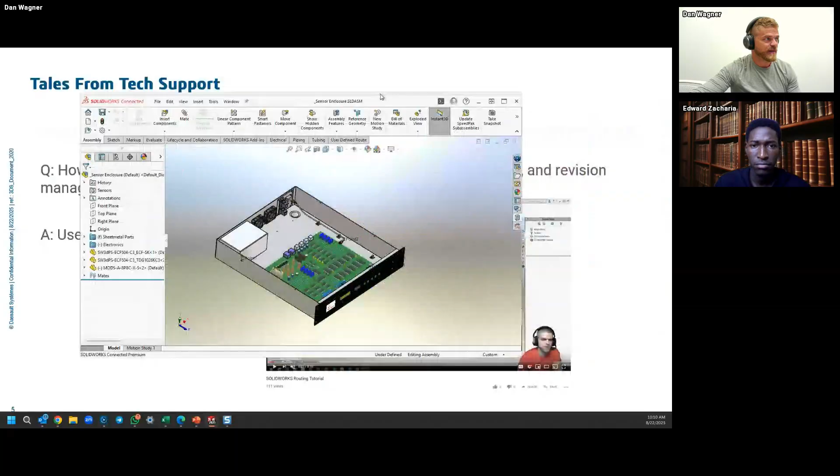What we're going to do is get into a question and answer format here in SolidWorks. I actually have SolidWorks open in the background, so we're going to do everything live. I'm not showing you any videos or pre-recorded stuff, we'll click through and do everything live in SolidWorks.

This was a question that came into tech support kind of frequently: how do we create a standard route that we can use again and again and revision manage it in PDM? How do we use it in PDM? The answer to that was doing something called reuse route. But the question's kind of bigger than that, because if you're familiar with SolidWorks... let me jump over to SolidWorks now.

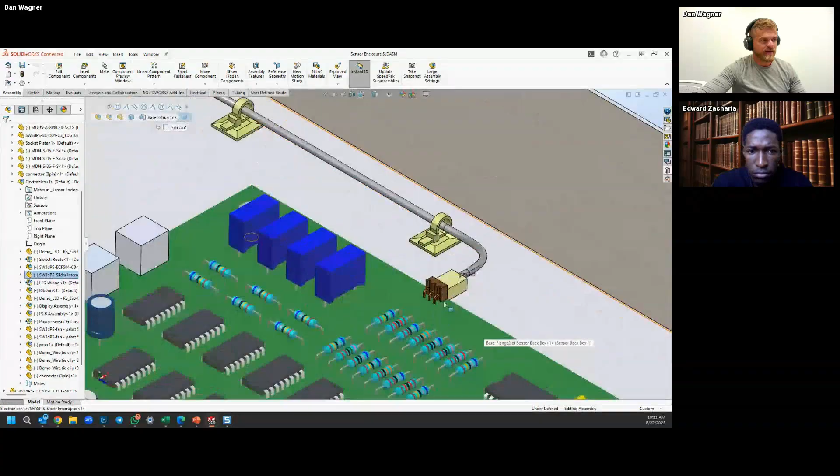If you're familiar with SolidWorks, you have parts and you put parts together into assemblies - that's basically at the end of the day what you do with SolidWorks. And if you get really advanced or detailed, you can do assemblies like this, where you have a detailed wire route showing how a component is wired from one end to the other. That's really powerful because you can get the lengths of those wires, figure out the covering, figure out how big they are, and place clips. So that really helps you lay out your assembly. This is just like an old electronics enclosure demo set that we used to use way back when.

But you don't want to do all that manually. No one wants to do it manually. How would you?

Maybe this is a good question for everybody. How would you model a wire if you had to do it manually, if you had to do it by hand? You can say it here out loud, or drop it in the chat. What's the feature you would use?

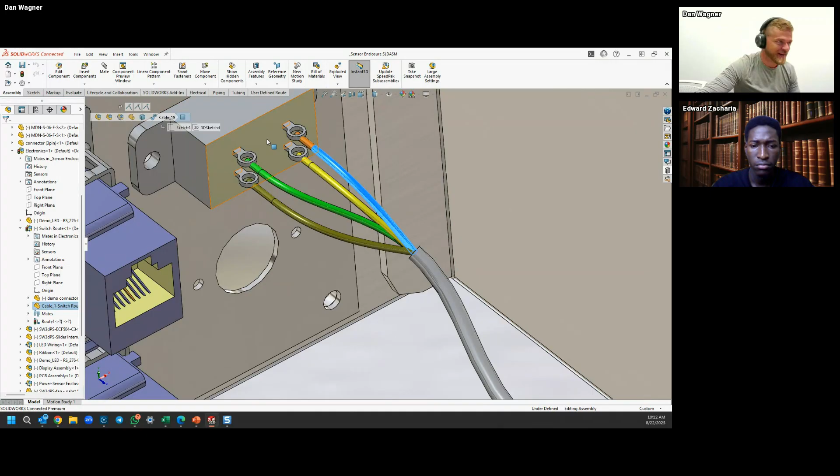Yeah, exactly. Faiz says I would use sweep. Exactly, right? You don't want to sweep little circles all over this assembly manually.

So SolidWorks created something called routing. Routing is an add-in you can use in SolidWorks, and routing gets you electrical, piping, and tubing routing. Those are all design realms that really work well with routing. When you have routing turned on, you also get this little extra library in your design library.

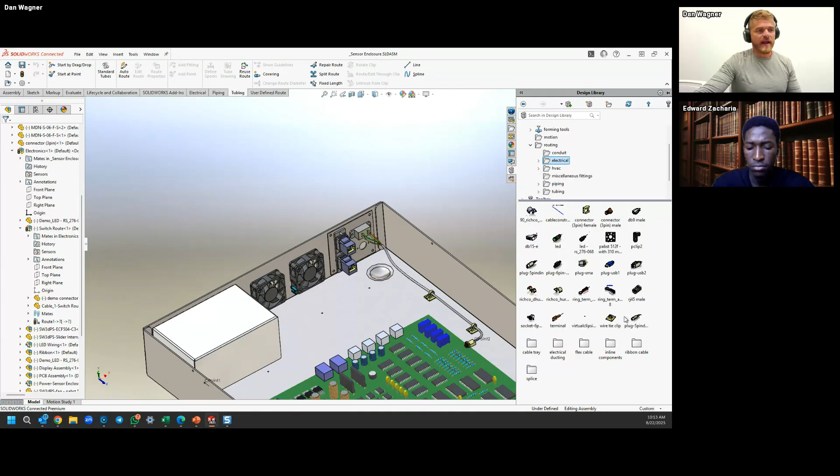So it's actually a routing folder with electrical, piping, and tubing components. A route component is just like any other SolidWorks file, but the component gets a little bit of extra information in it. For example, if I want to start a new route, I can find this RJ45 connector, which is just an Ethernet connector. You've seen one of these for sure.

If I click and drag that into the assembly, it actually snaps right into place, which is really cool. You can see it snapping into these two RJ45 ports. As soon as I let go, it automatically starts a new route and brings up the route properties for that route. The reason for that is the part had some routing information built into it, so routing knows that dragging and dropping one of those in automatically starts a route.

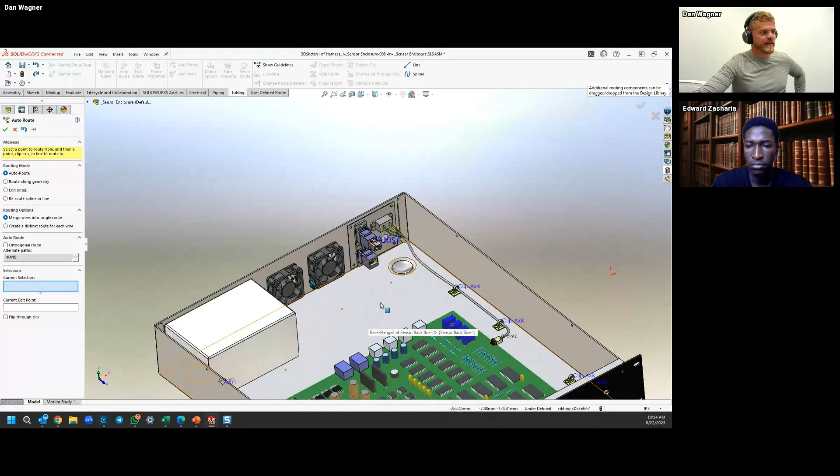So here I can decide what templates I'm going to use, decide what this is - it's a harness - and I can even decide the outer diameter, the total outer diameter of this wire. You can mess around with that if you're making a bigger or smaller wire. But I'm going to hit the green check just to confirm those route properties, and it's now put me directly into this new route to continue modeling here.

So let's bring another one in. I'm going to go back to my library, back to that RJ45 connector, and then we'll drop it into this port here, for example. Oh no, SolidWorks is crashing.

You guys can't see it, but on my other screen, SolidWorks just crashed. Man, this is live. This is what we do, right? All right, so here's a new tip. When SolidWorks crashes, what do you do? You certainly restart SolidWorks, but also I recommend this quite a bit.

We'll actually talk about this a little bit later - SolidWorks RX. We'll pull this up later in the presentation to show what RX does. If you've never opened SolidWorks RX, it's pretty cool. It has a lot of really great built-in diagnostics, including information about your graphics card, your RAM, your total memory, all that stuff. We'll cover this later, but I would always advise you to open that when you're ready.

So, all right, we're doing this live, everybody. You gotta love live demos. When you're in a live demo and SolidWorks crashes, I go back to 3D Experience SolidWorks Premium and launch it. Notice I'm launching it here from the 3D Experience platform, not from my desktop. I'm opening the SolidWorks connected version, which is still SolidWorks, but it launches from that platform and connects right to our cloud space.

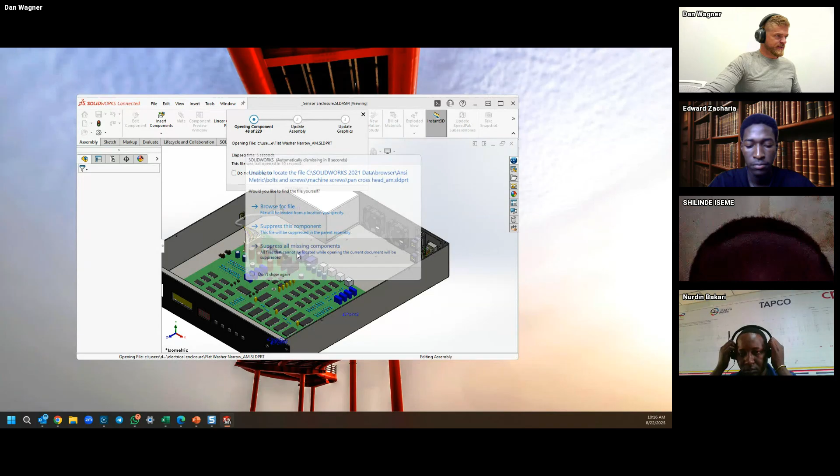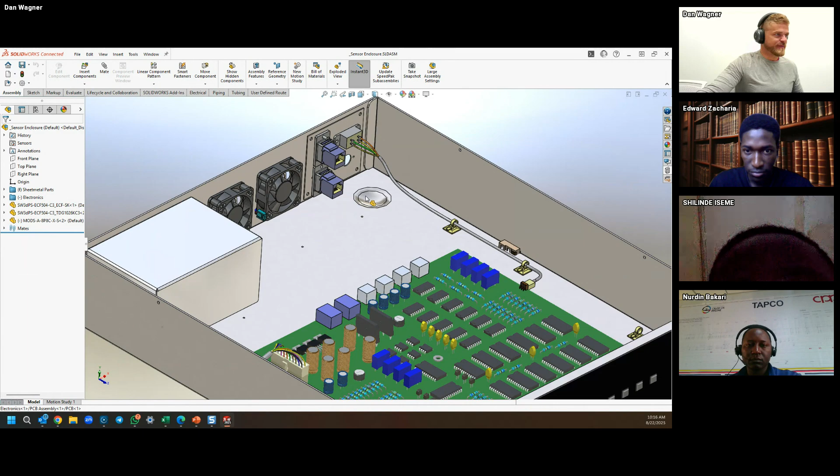So we'll do design library, routing parts, electrical, RJ45, and we'll click and drag that in. Looks good. Let's bring another one in, another RJ45, and I'll drop it here. Oh, I gotta complete this command.

Another RJ45. We'll drop it there. All right, SolidWorks didn't crash. We're good, we're back in business.

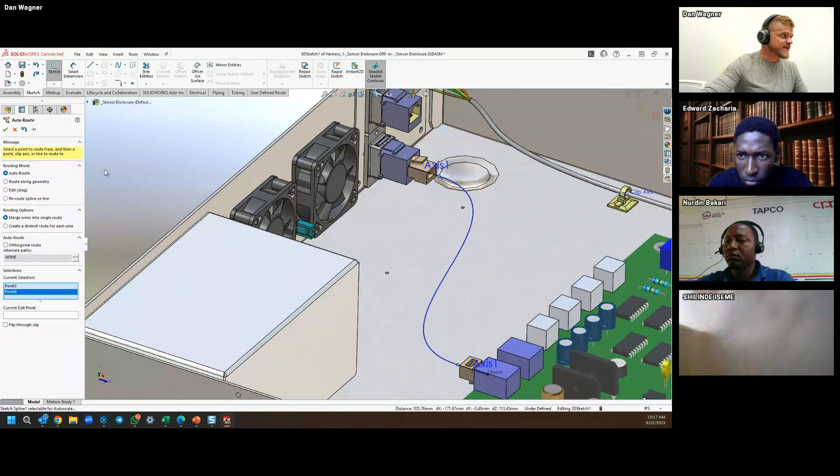So this is pretty cool, right? Now that you're routing and you have your two parts in space, like this one here and this one over here, as Fai said before, you would use sweep if you're doing that manually. But if you're in routing, you have something called auto route. Auto route lets you pick, I want to route from this point to this point, and it automatically sketches the path and says, hey, this is what the sweep is going to look like. That looks pretty good, and I can green check that.

I can exit out of the route to see what that looks like, and I could increase that wire diameter, by the way. We just made a small wire. But if you look at what that did, it inserts the part and makes a nice straight section, you get a little stub here. Then it automatically sketches this 3D sketch and the sweep for you from one part to the other. That saves you a ton of time, right? That means when you're working in an assembly, all you have to do is drag and drop your parts in and then auto route from one part to the other.

Now to finish this question, the customer support question was always like, hey, that's great, but if I'm doing that over and over again, I don't want to have to repeat that process. Maybe you use the same wire all the time, right? Maybe you have an assembly where you have a typical wire harness, where it's the same one you use over and over.

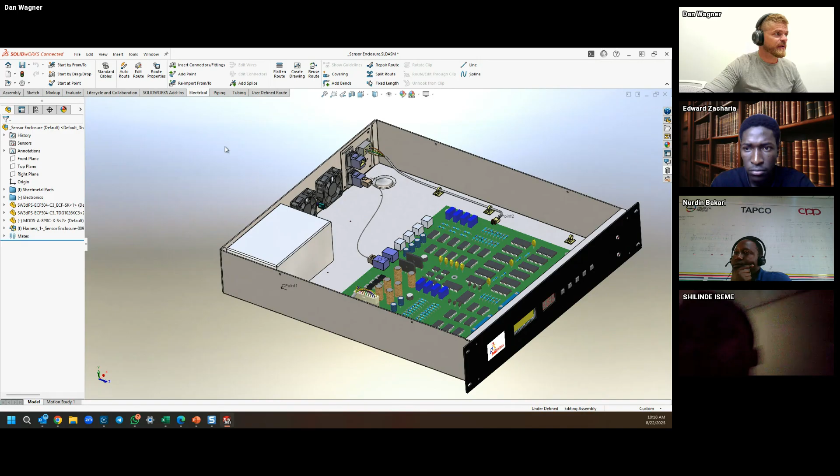SolidWorks has this command called reuse route. Reuse route lets you toggle through, like, okay, here's one route I could reuse, here's another route I could reuse, here's another one. It's just toggling through all the routes, or here's the one that we just made. So I want to reuse this one that looks pretty good.

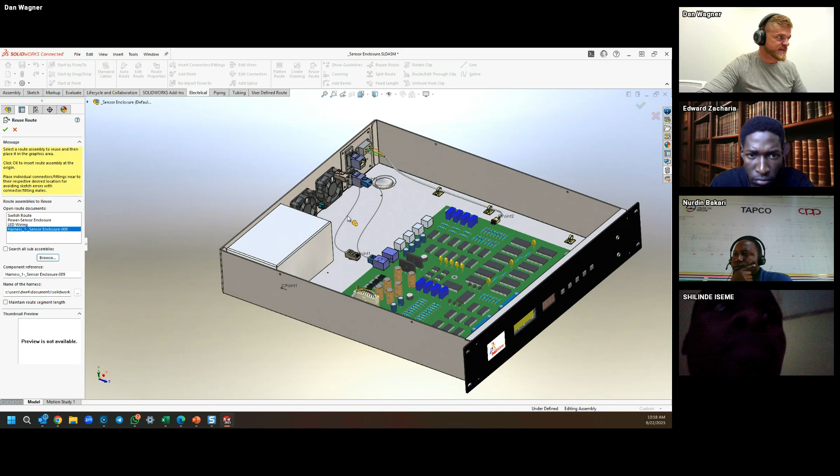So if I drop it here in space, it starts putting you in the mode to place your connectors. I know I want one connector there, and then I think I missed that one a little bit, and then one connector here. Oh, this one got misplaced, but then it'll drop that one and I'll hit green check. Yeah, I missed this first one here, but let's do that one more time. I'm going to delete that route. Oh, I got to get out of the subassembly.

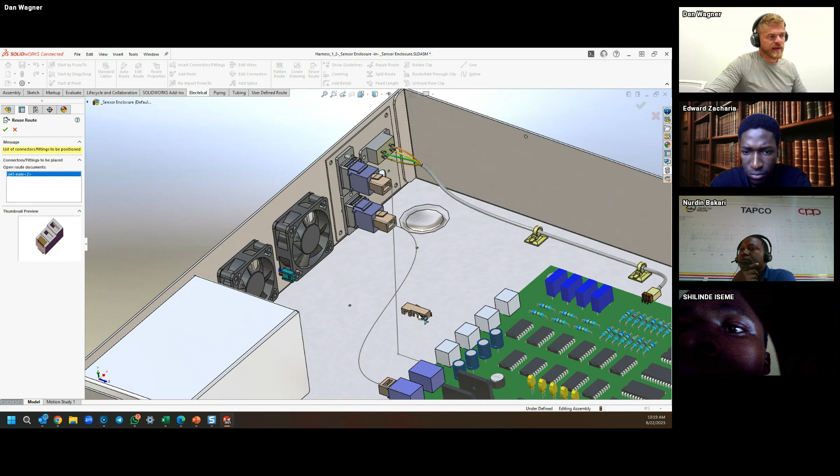Yes, all right, one more time. So we're going to do reuse route. I clicked a little too fast when I dropped that first component, so drop this one. As long as it snaps into place, this looks pretty good here. There we go. That guy, this is kind of cool too, like I don't even have to spin the assembly around to get it into this one. You can spin around a little bit just to make sure, but it will do a pretty good job of doing that, even if you do it by hand.

Yes, that's fine. Looks good, those connections are a little off. All right, there we go. It came up a little goofy with these route points here, but the point is I can click and drag and drop those routes in multiple times. That second one is kind of fighting me a little bit, but that's all right.

And if you look at what routing does and what routing is, I'll zoom in on the tree here a little bit on this route. Everybody here is probably familiar with what a part is, right? You have a typical part file. This is your part symbol here.

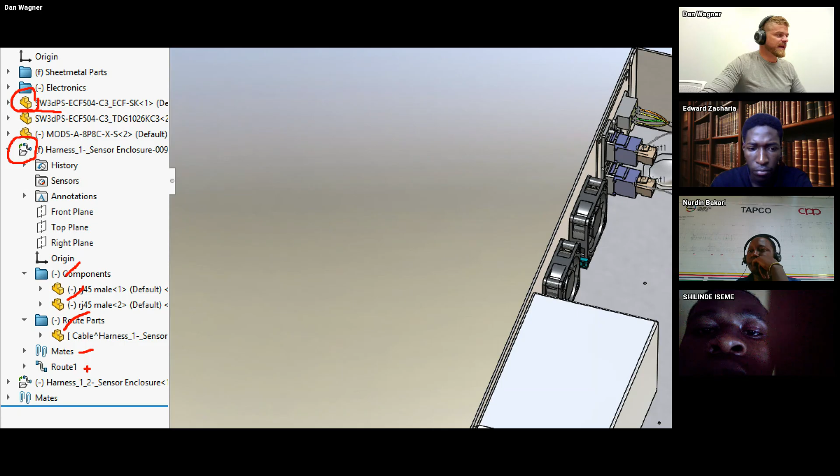And routing is still doing that, it just puts it into a folder, right? It's still making parts. Here's my two RJ45 connectors, and then there's the cable itself that routes between them, and then the mates that hold them together, and then the route information. So it's still all the same stuff that you're familiar with, right? It's still just parts and assemblies. But what routing does is it automates all those clicks for you and just makes that process a lot faster.

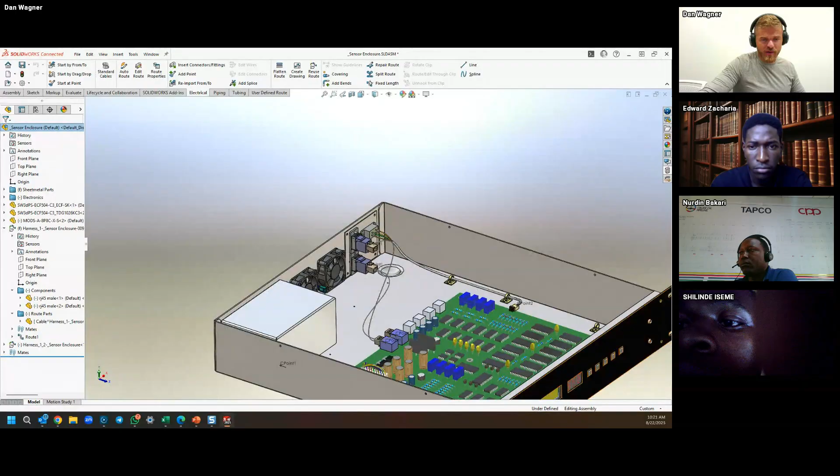Hopefully, I ran into a couple problems there, but I think that's just from my route template. So let's go all the way back to our presentation here, and that's a little demo of routing and a little demo of reuse route.

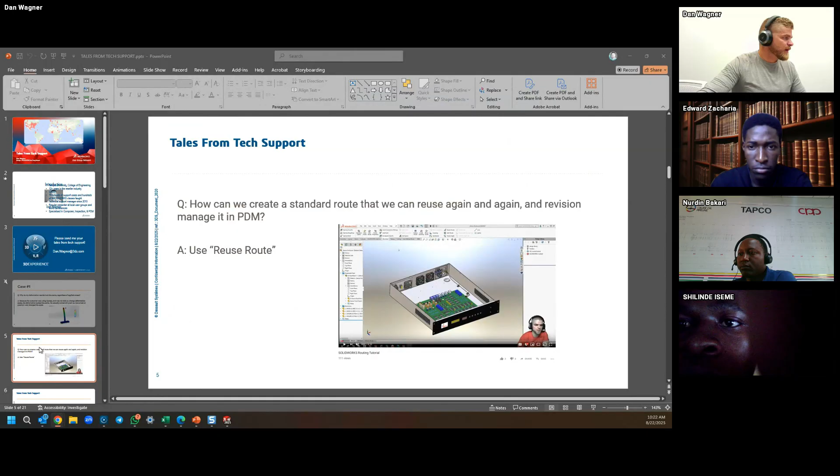All right, cool. Any questions in the chat? Let me know. When I first saw routing, I thought they would also show the current follow through. Please share some tips and tricks on weldments and surface modeling. I don't know if I have any weldments or surface modeling in this presentation, but we could also do that in a future one. This is pretty interesting too.

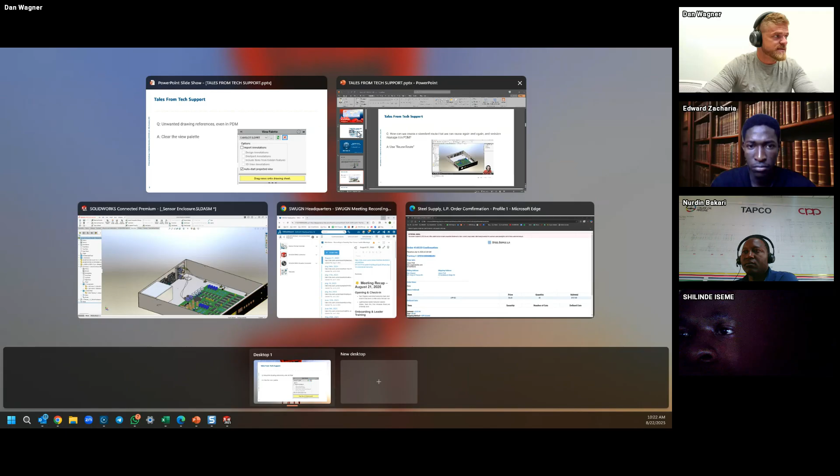So when you work in SolidWorks quite often, one thing you will definitely run into is references—basically how parts are connected to each other. And getting back to what's important in SolidWorks, what are some of the things you can do to keep working and not get bogged down by daily tasks.

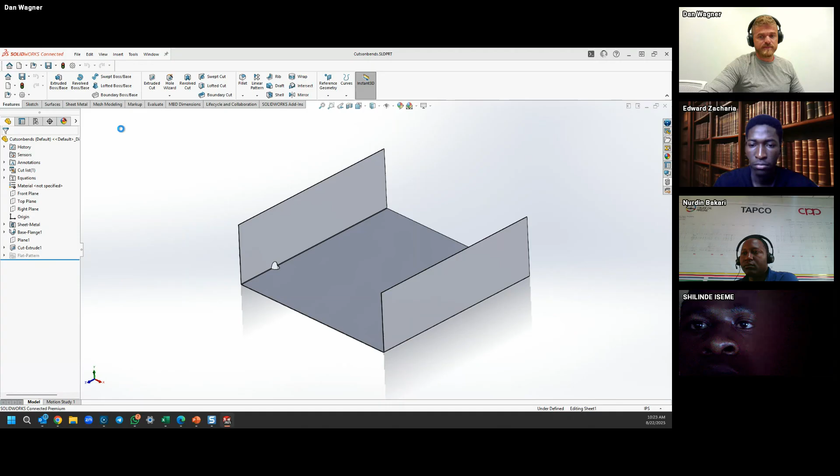I'm just going to open up any old sample file here. It doesn't really matter what part we use, even if I use this simple sheet metal part. If I take this sheet metal part and do File, Make Drawing from Part, we'll do a landscape drawing. Maybe you've done this before, where you're making a drawing of a part, and that drawing will have an isometric view, a top view, and a front view, and we could project even off of that, like a bottom view or whatever type of view you want.

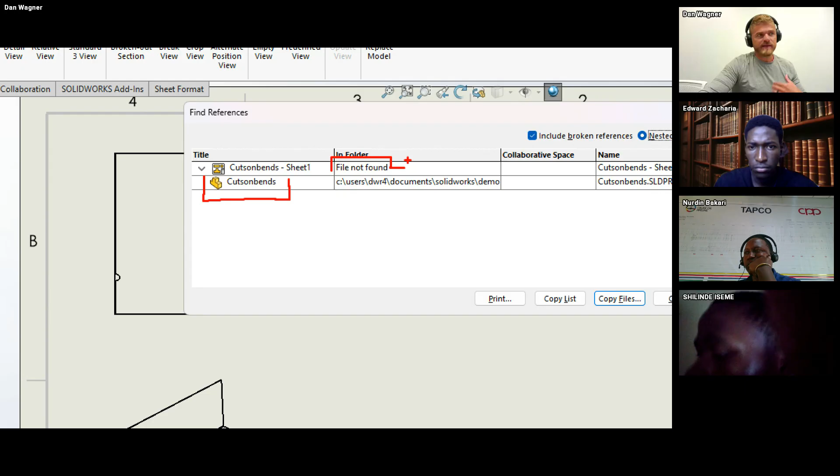The point is, as I'm doing that, I now go to File, Find References. I'm building in references to that original part—this was the original part that I opened, this cuts and bends part. But then I went and made this drawing. I haven't saved it yet, so it doesn't have a file name yet. But you're connecting parts—connecting parts and their connections to each other.

Even if I went back to that other assembly, a sensor enclosure assembly, this has 200 plus parts in it—a lot more parts. I do File, same thing. Anybody can do this on your assemblies. File, Find References. Here's all of those parts that are in this assembly.

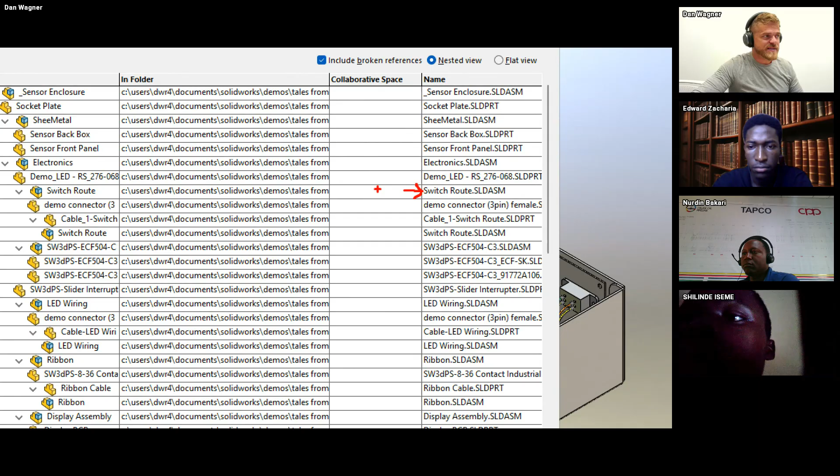So as a SolidWorks user, it's really important to keep track of your references and understand where they are, because SolidWorks is just looking for file names. If you don't organize your files correctly, your assembly can actually open up the wrong file. Let's say you have another part in the same folder called switch route—it's just going to open up that file, because it's looking for a file named switch route in this example. It's important as a SolidWorks user to check these references and make sure your assembly or drawing is referencing the correct parts and assemblies.

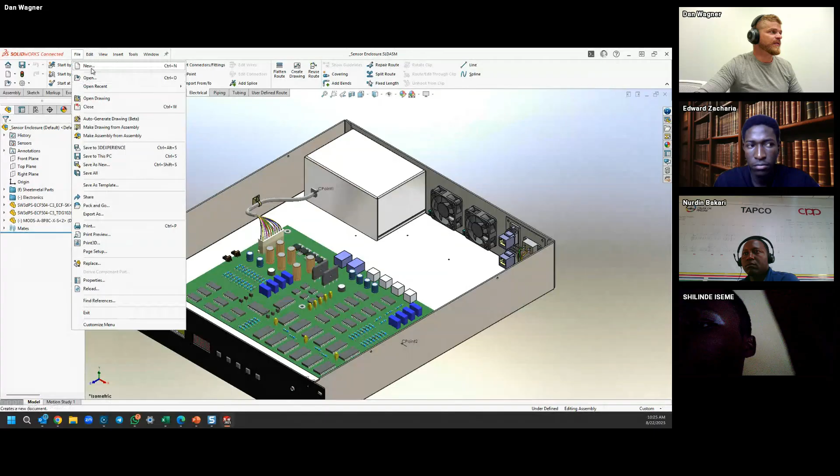One thing that can happen, and this is what I was showing before, is if I have a brand new drawing—I say File, New—maybe you've done this before where you just do File, New Part, New Assembly, or New Drawing. This is a totally blank drawing, I'll just do a landscape drawing here. I haven't put any files on this yet. So if I do File, Find References right now, it's empty—there's nothing here. I haven't yet connected this drawing to anything else.

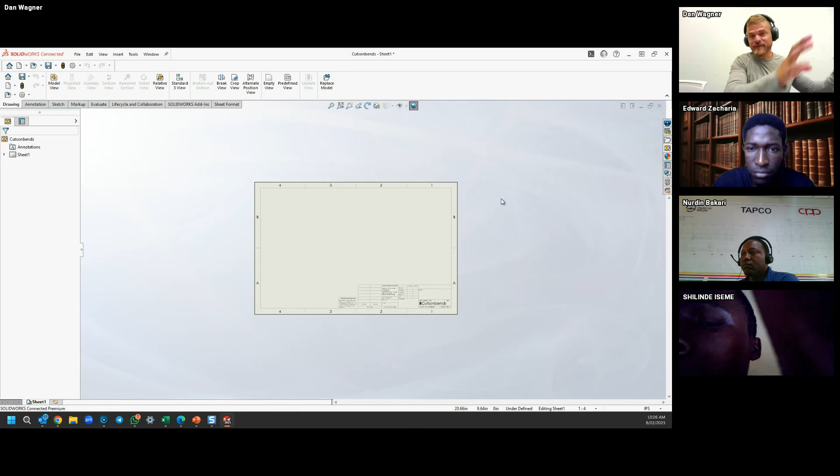If I simply close the model view and go to the View palette, which is where we were before—the View palette lets you pick, maybe I'll do this cuts and bends part—and even if I just hit cancel here, I still haven't done anything, I still haven't brought any parts on here. But now if I go to File, Find References, I've created a connection to that cuts and bends part simply by opening the View palette.

So the question all the way back here on the PowerPoint was: hey, when I open up a drawing, it has a weird reference.

It's getting a weird reference to some part that it shouldn't be referencing. That's important in SolidWorks, tracking your references and making sure they're connecting to the correct parts. So if you ever have a drawing that you open and it seems like it's pulling in the wrong reference, you'll know this.

Has anybody ever used pack and go before? Pack and go is another really powerful command in SolidWorks. If I switch back to this main assembly and want to send it to somebody, a really easy way is file, pack and go. It literally packs everything up and puts it into one file. That's what this little interface is.

You have a lot of options here. I could spend 20 minutes just on pack and go tips and tricks. But the point is, sometimes you'll come across a reference where you go, oh, that's weird, why is pack and go trying to grab this random file? I'm just making something up here, but imagine it grabbing a random file and trying to bring it in.

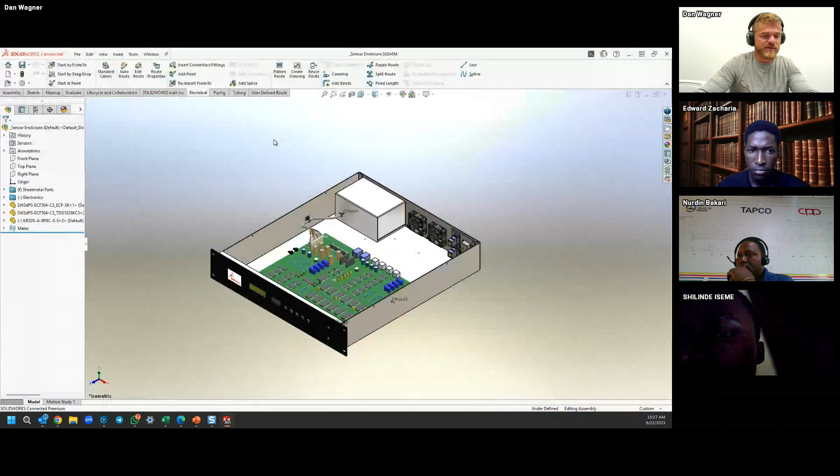Getting back to this drawing we were looking at a second ago, you have to open up this view palette. And even if I just hit clear all, I can clear out that palette. Now that file find reference is gone. You're wiping out that extra reference or extra connection at that point.

So maybe you've run into that before, but I highly suggest for any SolidWorks user working with an assembly or drawings, keep a close eye on your references. Make sure you're managing your files correctly. Regularly check your references and make sure it's picking the right files to pull in.

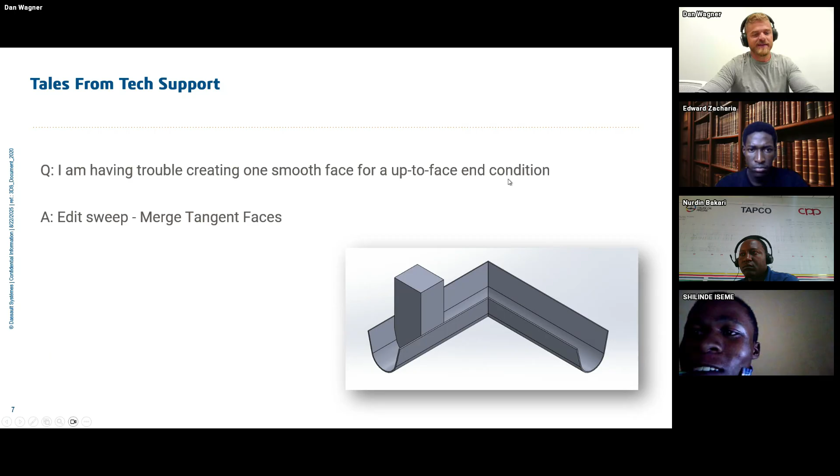So the question was, I'm having trouble creating one smooth face for an up to face end condition. And what does that mean? Let's get over to SolidWorks.

I'm going to clear everything out right now, so I'll do window close all. That gets rid of everything, and I don't need to save anything. I'm going to hit R for recent documents, I use that all the time. Hitting R opens up this window here, and I'm going to open up this sweep part.

Now, this is really simple so far, right? This is a really simple part. It has three things in the tree: a sweep, a plane, and then a boss extrude that goes up to that sweep. So the question from this customer, this is not their file, right?

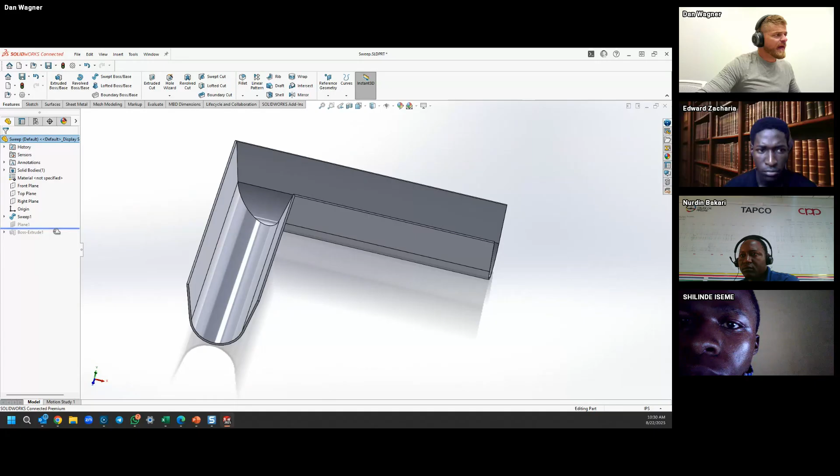I had to recreate it with just a sample file. But the question from the customer was, I'm trying to sweep something, picture a really complex surface, and then they were extruding up to that surface.

I'll hover over this part and press tab. Tab hides a part, or excuse me, a body. Shift tab will bring it back. So if I just hover over this part and hit tab, it'll hide it and go away.

But the problem is when they're doing the extrude, they get left with extra faces, right? It's not one smooth face. There's extra tangent faces here that are really just the result. I'll do shift tab to bring that back. They're really just the result of this, right? This part has one face there, and then one face there.

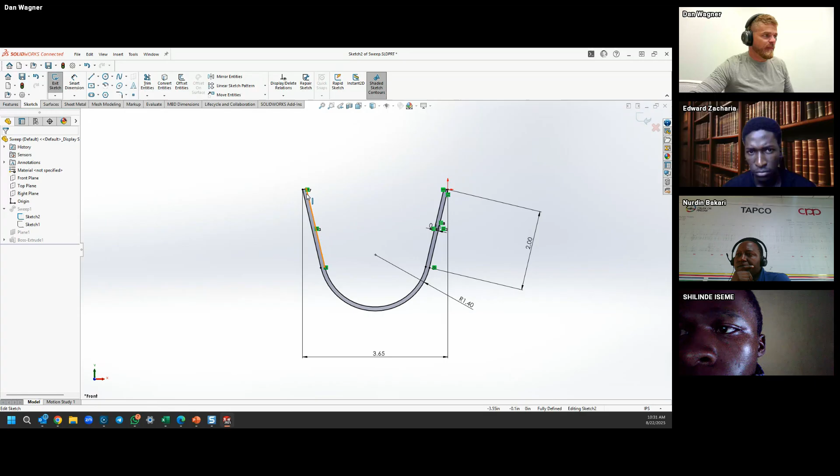So if we go back and look at that sweep, I'm just going to find the sketches in the tree that made that sweep. We talked about sweeps a moment ago when we were talking about routing. I picked this sketch and hit edit sketch. I can see what I did here is we sketched a kind of simple shape with some tangencies.

And those tangencies ended up making, I'll exit the sketch, perfectly tangent faces, which is fine, right? That's great. But when we go and extrude up to that face, our resultant body ends up getting those faces on it too, right?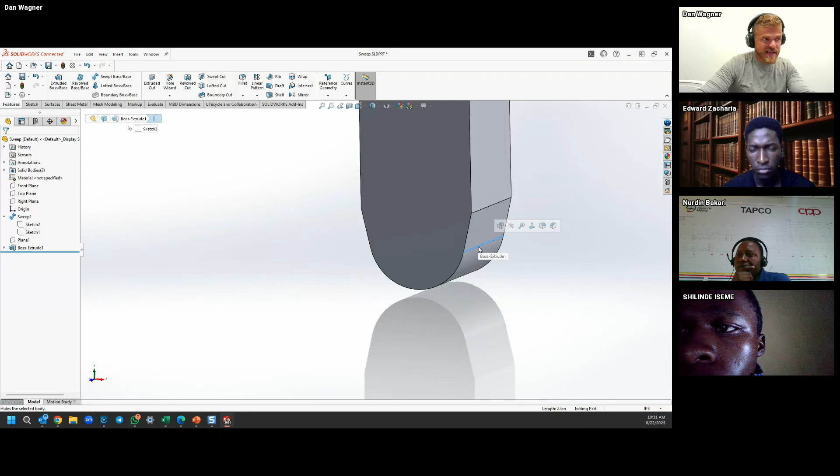You end up with those same edges that were on the part you're extruding up to. Well, one really cool thing in the sweep command is a simple checkbox to fix this.

So I can go back to sweep and edit the feature. There's an option in the sweep itself called merge tangent faces. If I merge those tangent faces, you see what's happening there is anywhere there's a tangency in the sketch, it's merging that into one smooth continuous face. So I'll hit green check.

That looks good. Let's bring that body back for just a second. And now you see a nice single continuous smooth face on that bottom part. And then we'll hide our sweep.

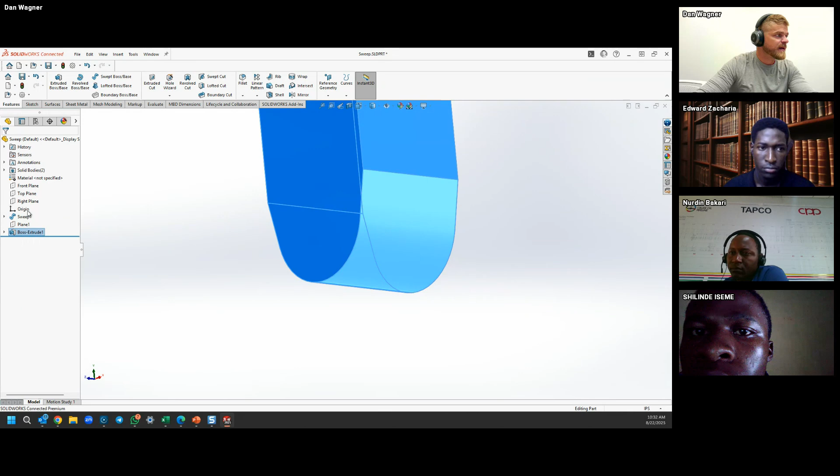And then that means the resultant body, because this body here is just a simple extrude up to next, right? This is extruding up to the next surface in space. So when it extrudes up to next, you get a really nice continuously smooth face, although I know that sketch actually had multiple edges, multiple faces in it.

This is a simple example, but the point is pay attention to those options and pay attention to your resultant face or resultant body if you're doing any sort of end conditions like that.

All right, so let's dig into some performance tips. This is stuff that's gonna help with, how do I make SolidWorks run faster? Let me know in the chat.

Has anybody ever had SolidWorks run slow or crash? Has SolidWorks ever crashed? It just crashed for me 2 minutes ago. So let me know in the chat, has anybody ever seen a crash before in SolidWorks?

Well, there's a bunch of things you can do to make SolidWorks more stable and run better. There's a bunch of general performance tips and things you can do that should help your experience improve in SolidWorks quite a bit.

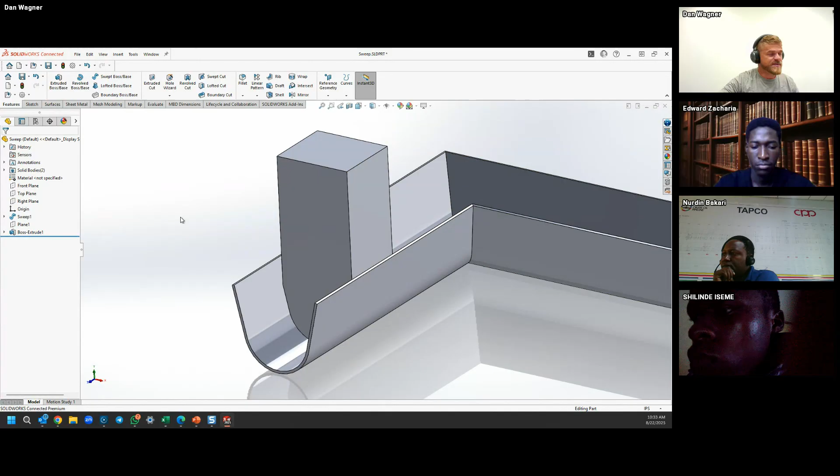I'm going to pull up SolidWorks to cover one or two of these examples. There's things in SolidWorks you can do regularly to check your performance. One of those is the registry in SolidWorks. The registry is actually in Windows, and it handles all your settings and preferences, right? Any setting or anything you do in SolidWorks.

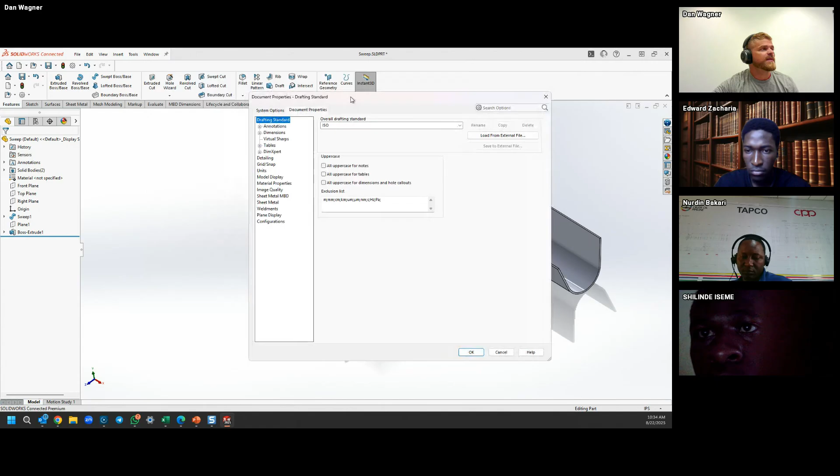So I'll go to SolidWorks and do tools, options, document properties, and all your settings, right? Anything you do in system options or document properties, those are all things stored in your registry. Well, sometimes your registry can get corrupt, and sometimes you run into problems there, so you have to reset the registry.

Maybe you've seen that before, maybe someone's helped you do that in tech support before. But the other thing you want to do is check your graphics card. That was the number one thing, right? If you're having issues in SolidWorks, the number one thing you want to do is go to Help, SolidWorks RX.

And when RX opens, you can go to Diagnostics, and the very first section is about your graphics card. SolidWorks needs a pretty specific graphics card to run correctly. It will run on other cards, it will work on other sorts of cards, but for the most part, you need a capable NVIDIA graphics card to be able to run SolidWorks correctly at a high performance level.

So let's say you've already checked those things, right? You've already run into some problems, you've already checked your graphics card. And for everybody here, that's something I would highly suggest you do: open SolidWorks, go to Help, SolidWorks RX, and check and see what it says about your graphics card.

You can even dig into the certification page, and this will help you download the right driver. You can tell it what year you're running, what system you have, what specific model, and what graphics card you have. Then you can double check from there and end up getting the right driver for your particular machine.

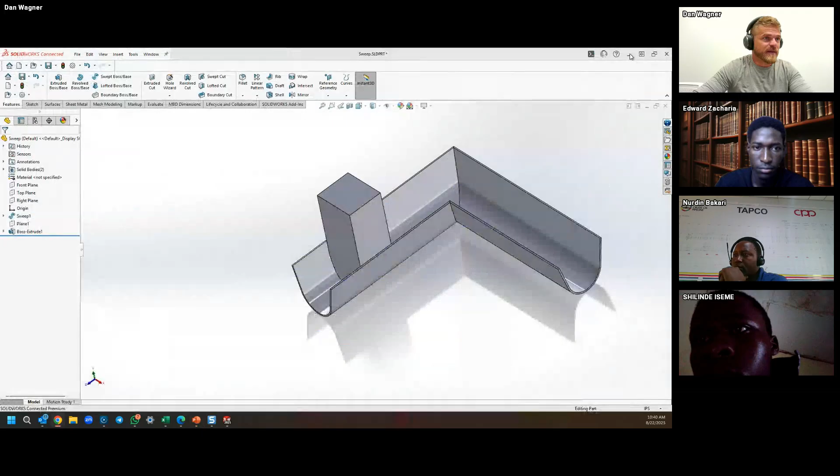So I usually turn this off. This is something I would just go in and disable because I want to use the big card all the time. I want to make sure it's using the NVIDIA card at all times. In fact, even on my desktop here, let's jump all the way out to my desktop. I'll go to more options here, and then we'll open up the NVIDIA control panel. Maybe this is something that you've seen on your machine. If you have an NVIDIA card, it should already be installed there by default.

All right, the third one's kind of cool. This is like a little bonus, but there's another one called USB Power Share. And if you enable this, it means that you can put your laptop in your bag, and even when your laptop is off, your USB ports will be live. They'll have power.

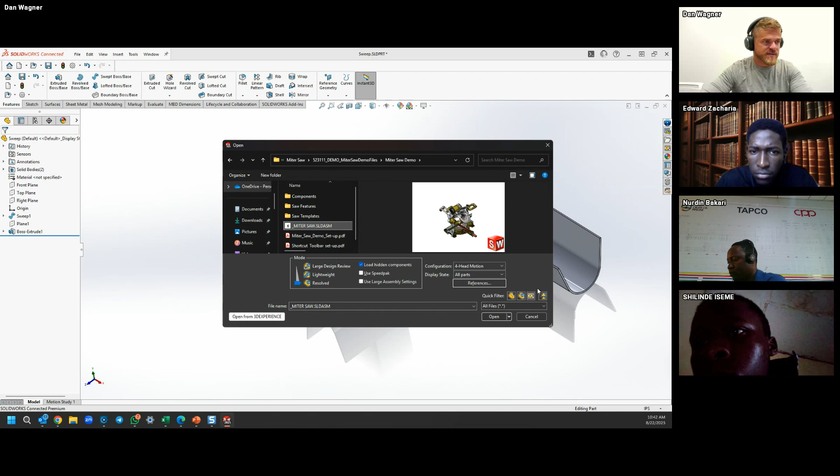Okay, some other really interesting performance issue related to SolidWorks. Why is my SolidWorks so slow, right? You always get back to this question, especially if you're working in a big assembly. Let's open up something larger, a bigger assembly. I'm going to go to File, Open. I haven't opened this in a while, so let's dig a bit here and find my miter saw. I have a really cool miter saw data set here, and this, like anything else, is just an SLD ASM, a SolidWorks assembly miter saw. Let's get this open.

300 plus parts in this saw. Looks pretty good. Maybe you've seen this before, where a larger assembly takes a little bit longer to open. Right now it's creating a bunch of hardware for me. Maybe a great time to have another sip of coffee.

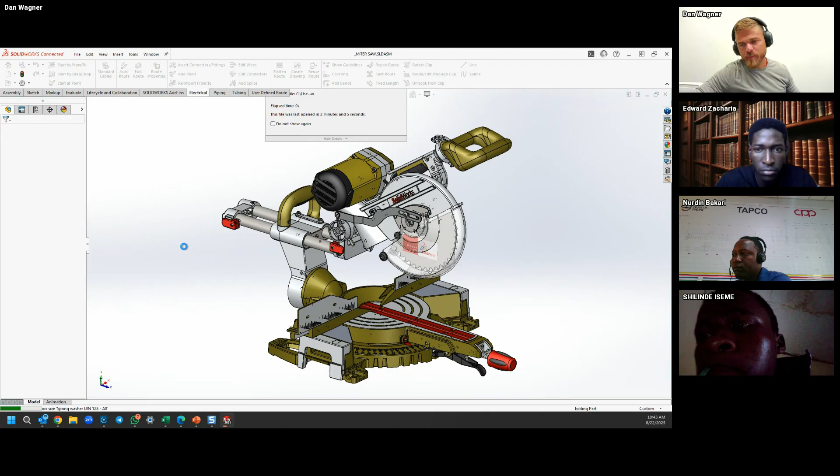All right, so we're going to get that open. And while that's opening, I'm just using it as an example to say sometimes you might experience slowness or slowdowns in SolidWorks. We just went through a lot of tips and tricks for the BIOS - let me close those mirror graphics - like things you can do in the BIOS to make SolidWorks faster. But there are other things you can do as well. This is actually important if you're running a machine that's not cut out for SolidWorks, maybe not a top tier performance machine. I don't know if some of you are in college or school, but when I was in school I had a crappy laptop. It was not great, not a good laptop. I have a better one now, but when I was younger I did not.

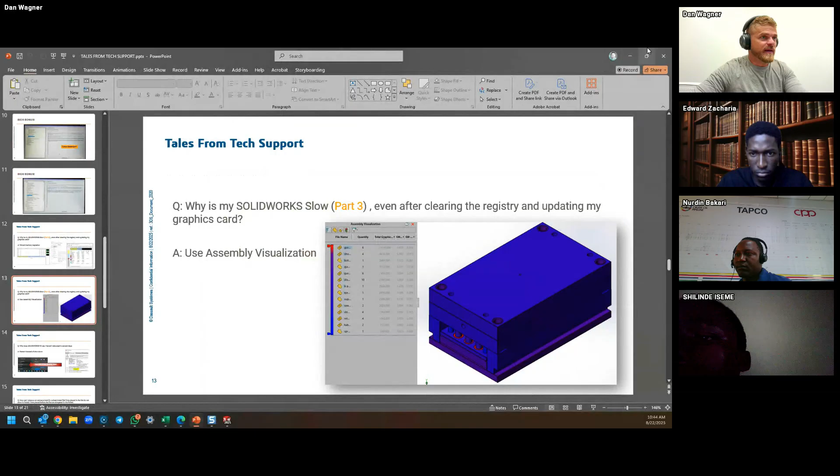And there are things you can do even with your memory to try and make SolidWorks run a little faster. So let's get to the desktop and I'll show you what I mean. I'm going to right click in my task pane here and find Task Manager. Task Manager opens, and you've probably seen it before, where you can go through performance and see how your machine is doing from a CPU, memory, and so on.

If you click memory, memory is your RAM - how much RAM do you have? I have 32 gigs of RAM on this machine. You might have less, you might have more, but this tells you how much RAM you're using and how much is free. I can hover over these fields - I see I'm only using 21 gigs of 32, so I should have a whole bunch. But this little chart, let me zoom in so we can see it, says I'm only using 21 of 32. This little chart is misleading, and this is another space where you can make SolidWorks faster if you understand what's going on here.

So with this, I can get an idea if I look down here at what's going on. I've got in use, standby, and free. This is telling me I only have 1,300 megs of free RAM left, and that's actually a lot less than I thought. If you hit these three dots, you can open up Resource Monitor.

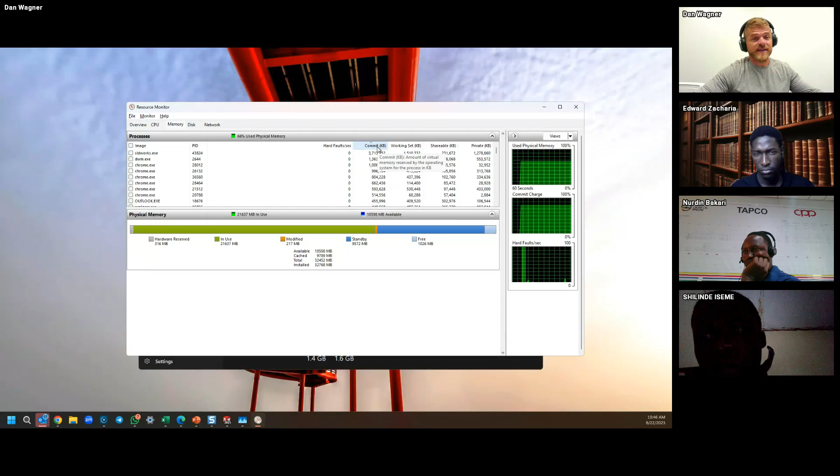Resource Monitor is like a deeper dive into what's going on with your system. I'm on the memory tab - you have all those same tabs at the top, but I'm on memory. There's a bunch of columns here, but I get that same graph: in use RAM, standby RAM, and free. Standby is something called committed memory. If I sort by this column, I can hover over it and see it says the amount of virtual memory reserved by the operating system for the process, in kilobytes. That means every time you open a new program - every time I open SolidWorks, every time I open my browser - the operating system is committing another chunk of RAM, even if it's not using it. So suddenly you get into a space where you're out of RAM, out of memory.

I didn't think I was because this chart didn't tell me. This chart's telling me I'm only using 21 of 32. But if I look a little closer, I'm actually basically out of RAM here. I don't have very much left at all.

So there's things you can do to fix this. You can just reboot your machine. You can certainly do that, right? If you reboot your machine, it will clear out all of your virtual memory and bring that back. But there's even more, I'll get back to the PowerPoint here.

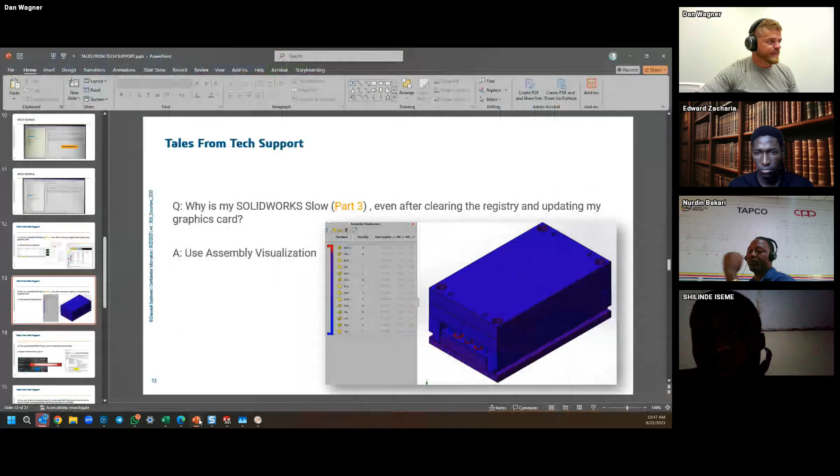There's even a really cool tool called RAMMap, and it's right from Microsoft. I don't have it installed here, but if we Google that, I'll show you all what that looks like. It's right from Microsoft, so it's not like shady software, it's directly from Microsoft. This lets you see specifically what's going on with your RAM, and it even has the ability to purge it.

So you can have RAMMap clear your virtual memory while it's open, which is pretty cool. It's one of the really cool functions. So I'll share that in the chat too, that you could take a look at.

And I would actually suggest you look through the other tools that Microsoft has, right? These are free tools directly from Microsoft that you can download and learn about, and they're just tools that are going to help you be a better computer user, someone who's more well versed in keeping your system running really well.

And virtual memory is something — if someone would call into tech support, they'd say, 'Hey, I have 64 gigs of RAM. There's no way I'm out of memory.' But then we would check and see, like, yeah, but your standby is using up most of it. And usually that's because you haven't rebooted in a couple days.

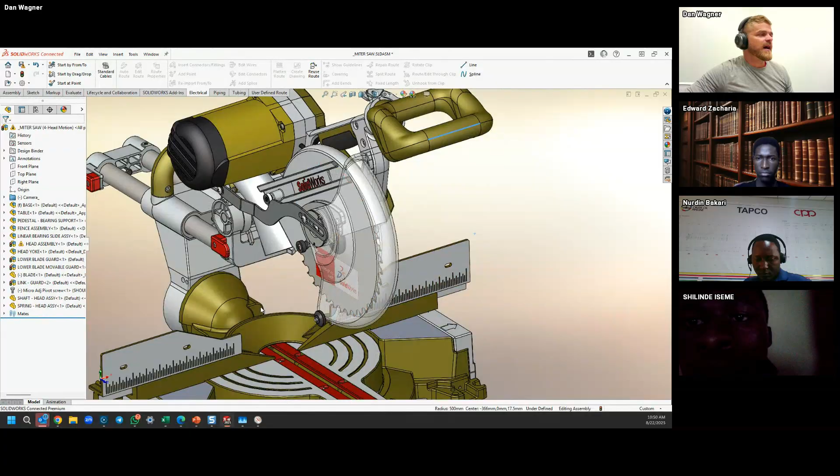Let's get back to SolidWorks, and I'll maximize my window here. And if I have SolidWorks open and I have this assembly open, maybe as a designer you've put a lot of parts together and you're starting to see some slowdowns. You're starting to see some issues with your assembly. And you're like, well, okay, what are some tools here that I can use to dig into that?

In your assembly, if you go to evaluate, look for assembly visualization. Assembly visualization is in every license of SolidWorks, everybody has this. And if I open that, it will basically organize your tree and color code your components based on topics of your choosing.

So maybe I want to sort the tree by mass. What's my heaviest part? Well, the motor is 4,000 grams, right? So now I can see right away what is the heaviest part, and it's even color coding it so I can see it. What's the second heaviest part? That base. What's the third heaviest part? The table. That's really cool.

But I want to look at performance issues. I want to look at what is making my assembly slow. This third or fourth button in here is performance analysis. If I turn that on, it just added 3 columns here: total graphics triangles, SW open time, and SW rebuild time.

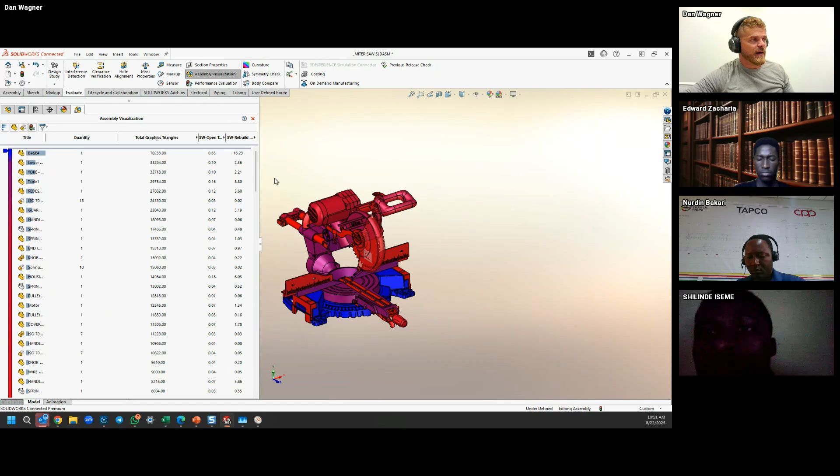And if I'm looking at those, I can now learn a lot of information about this assembly and maybe understand some of the things that are making it run slowly. Let's sort by this one, let's sort by total graphics triangles. Now I know that, okay, this base from a graphics perspective is the heaviest part in my assembly. Why do we think that is? Any guesses why this base is the heaviest, has the most triangles, and is the most graphic heavy?

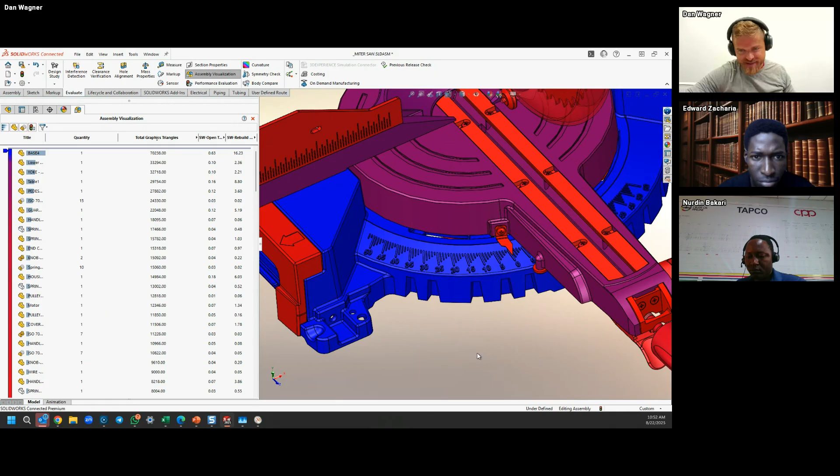Let's see, any guesses? If not, I'll just tell you. Let's do a really cool trick here too. I'm going to right click on this part on this base and hit component preview window. It opens up the part in this little extra window that I can zoom in and out and mess with, and I don't have to leave the assembly.

That's really cool. The reason that part is the heaviest is underneath it has a lot of extra faces, and on top it has this sketch text with all of these edges and new extrusions. Those sorts of things add a lot of graphics weight to an assembly.

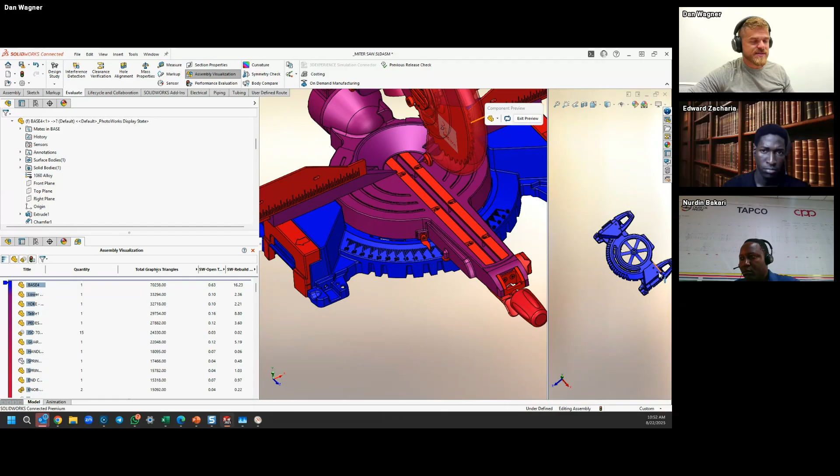So if you open something on your end and SolidWorks is stuttering, like it's kind of choppy - I'll hit exit preview here - you can use assembly visualization to figure out if it's the whole assembly, or maybe just one part that's causing all of those problems.

So now maybe I know I should go in and make a simplified version of this base, where maybe just the sketch text is suppressed, or maybe some of these fillets don't always need to be there - we could suppress those and make a simplified version. But the point is, this tool helps you learn and see that in real time.

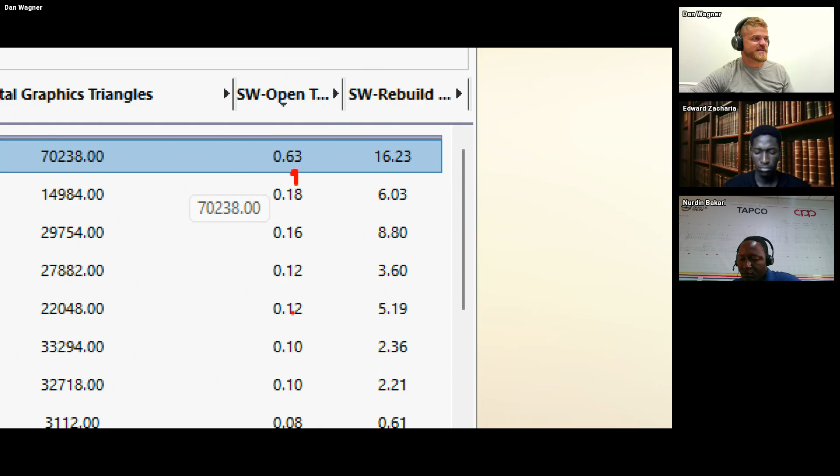I also get SolidWorks open time and rebuild time. If I sort by open time, it's telling me that base is the part taking the longest to open - relatively 4 or 5 times longer than the next closest part, which is still less than a second. It's opening in less than a second, but it's taking a long time, and the reason is probably having to recalculate all those graphics triangles on the way open.

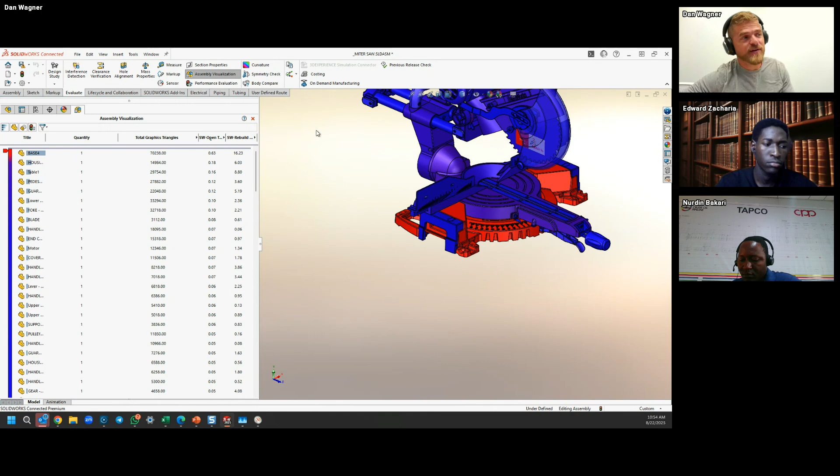In other cases this column is cool too, because maybe getting back to references we talked about before, maybe it's pulling the wrong version of the file, and this reference is sitting on a server somewhere else. Maybe you accidentally saved it or opened it from a different folder. This can really help you understand what part is causing the problem and helps you learn a little bit more.

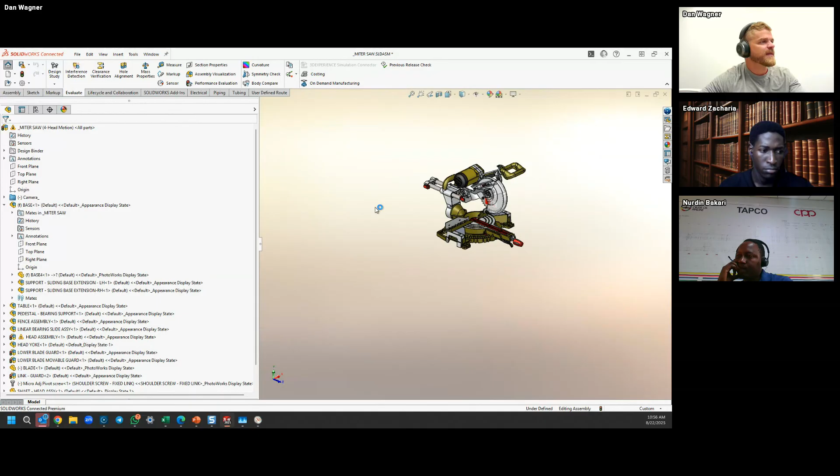Let's check out a quick sheet metal question - that's what's cool about this presentation, we jump around a lot. So now we'll take a look at a quick sheet metal tip. Let me know in the chat if anybody here has used sheet metal before. I actually had this part open a little bit ago, and the question from a customer is: hey, I have a really simple sheet metal part.

If you've ever modeled sheet metal before, it's pretty cool because you can model the part, and then with SolidWorks sheet metal you can flatten it. Then I know this is the part I'm going to first cut out of metal - this is my sheet metal part - and then I get to fold it up, and those are the bends. But here's the problem: maybe you're modeling a sheet metal part and you need a cut or some sort of feature to go across the bend region, but when you flatten it, it ends up being like this oval shape, right?

Because it's crossing that bend, it's not a perfect circle. SolidWorks lets you do something really cool called fold and unfold. So with the sheet metal part open, with this part already in its folded up state, I can unfold it. This is my fixed face, and this is the bend I'm going to unfold.

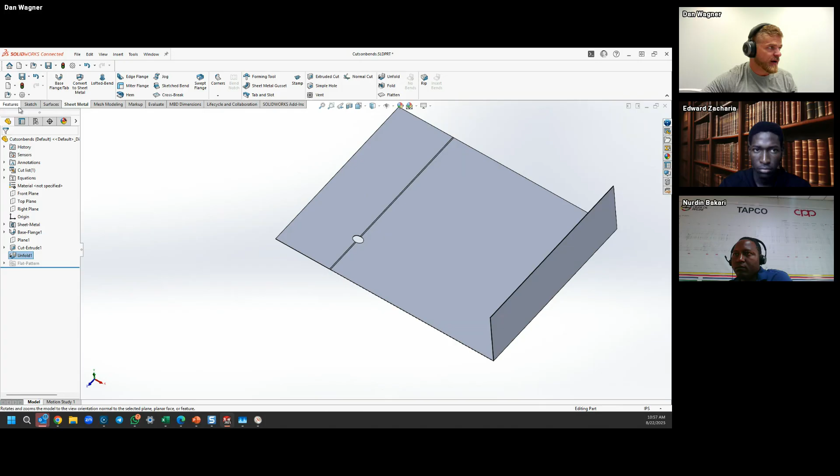I can unfold it, and then do a cut here. I'll sketch on this face. This is my process for sketching, maybe some of you do something similar: I pick the face, press the sketch button, and then auto orient my view. I do that every time. I hit S for shortcut.

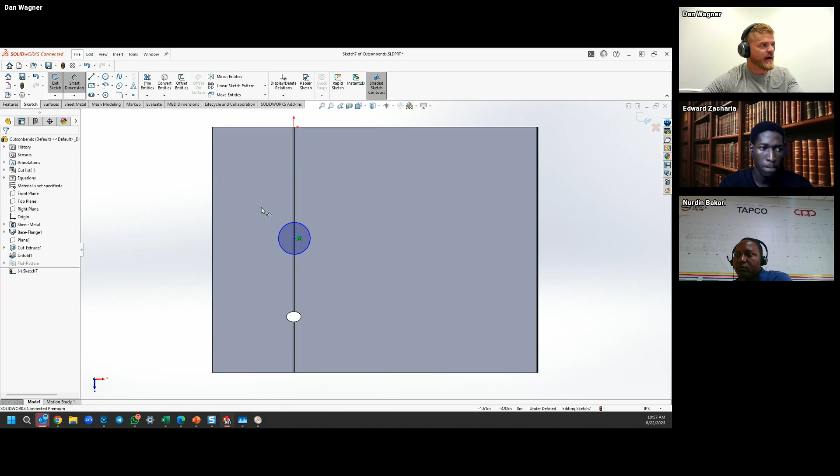I'll grab a circle and put it across this bend. It really doesn't matter where it is. I'll do S for shortcut, grab smart dimension, and put a dimension of maybe 1.5 inches. I want to lock this down, so we'll put a dimension from the top as well, maybe 6 inches. Oh, I think that was a little too far—6, not 60, inches. There we go, that looks better.

Then I'll take that and do a features extruded cut. Because it's sheet metal, I can link to thickness. This means that no matter how thick this part gets, the sheet metal cut will always go all the way through, which is cool. We can link to thickness of the sheet metal part, and I'll hit green check.

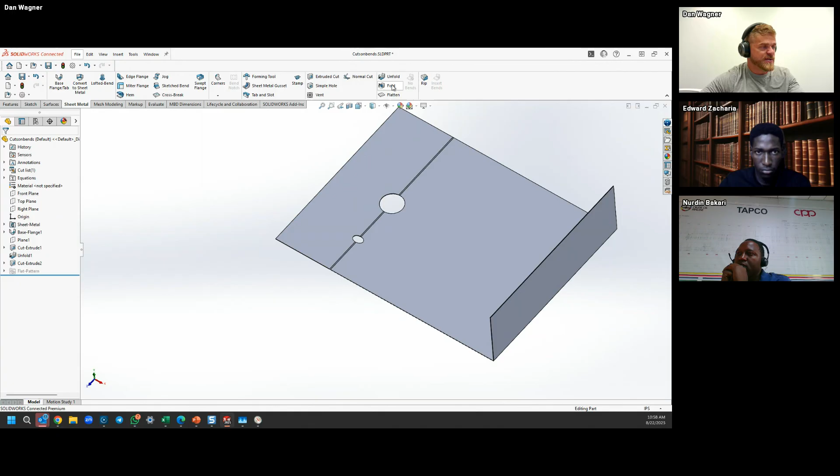The cool thing now is because this is sheet metal, I can go back to sheet metal and just fold it back up. I'm going to pick this as my fixed face, then fold this bend back up, and hit green check.

The difference here is if you look at these two holes, you don't end up with this elongated hole. You get a true circle that even if I flatten the part, will show as a circle and still shows as a circle when you're folding up. So this feels like a weird example, but if you've ever used sheet metal or tried any sheet metal design, that unfold and fold function is really powerful.

And I'll show you one other tip. Let me know, has anybody here done any sheet metal before? But even if I took—we can stay in this part.

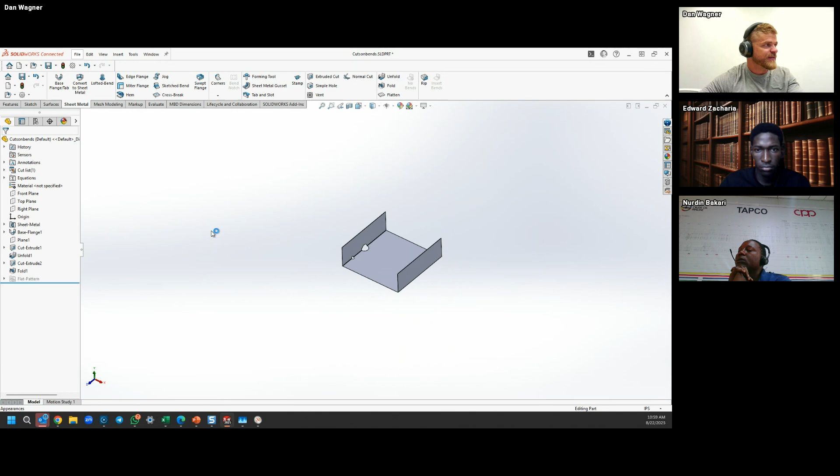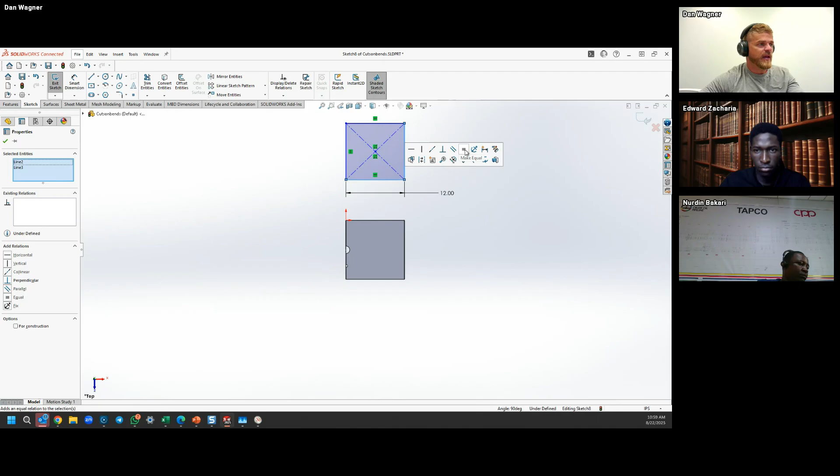It really doesn't matter, but I'll sketch on this top plane. I press the plane, begin the sketch, and we'll just put a box out here in space. It doesn't matter what it is. Let's put some dimensions on it, will be a 12-inch box. I'll grab this edge, hold control, grab this edge, and make them equal. Those two edges are now equal, right? So that's just a box floating in space.

And we'll turn that into a boss extrude that is also 12 inches high, not linked to thickness—this should go 12 inches high. End up with just a big box here in space, right?

Well, sheet metal has something called convert to sheet metal. Convert to sheet metal lets you pick a part like this box we just made and say, this is my fixed face, and then this is an edge, this is an edge, this is an edge, and this is an edge. I'll hit green check, and we'll see what that does.

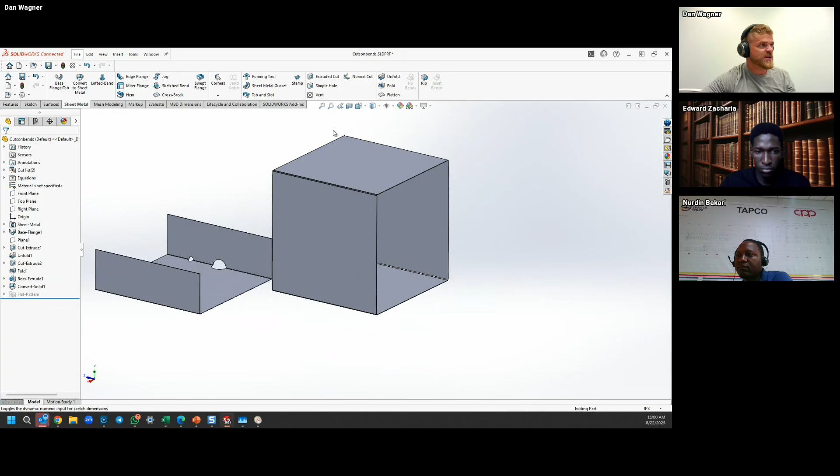Now it took that box I made and converted it to a sheet metal box that you could flatten, and ultimately you can kind of see what it did. It even ripped that edge to make that into an actual sheet metal part, which is really awesome. So that convert to sheet metal is really powerful because it lets you take a sheet metal body and wrap it around an existing body.

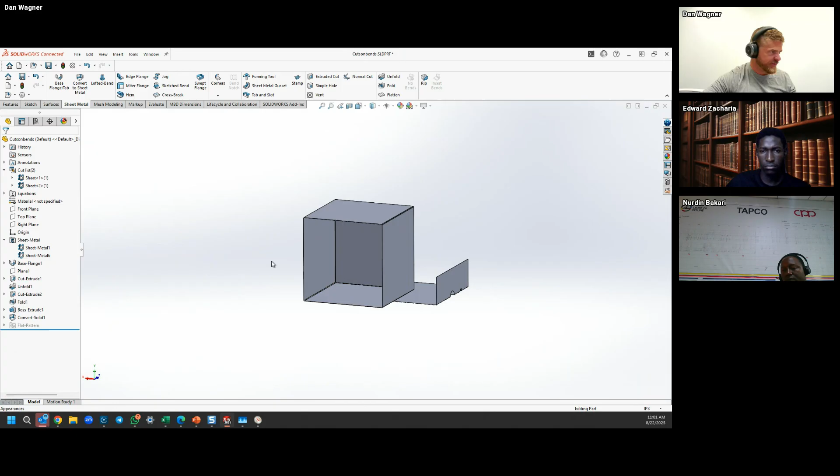Let me see if I can flatten just this one. Let's see, maybe I don't want these guys. I don't know if I can flatten just that one. I was hoping I could flatten just this one body, but I think I have to do it in a separate body for that to happen. Let's redo that in one more part file, and this will probably be our last tip here.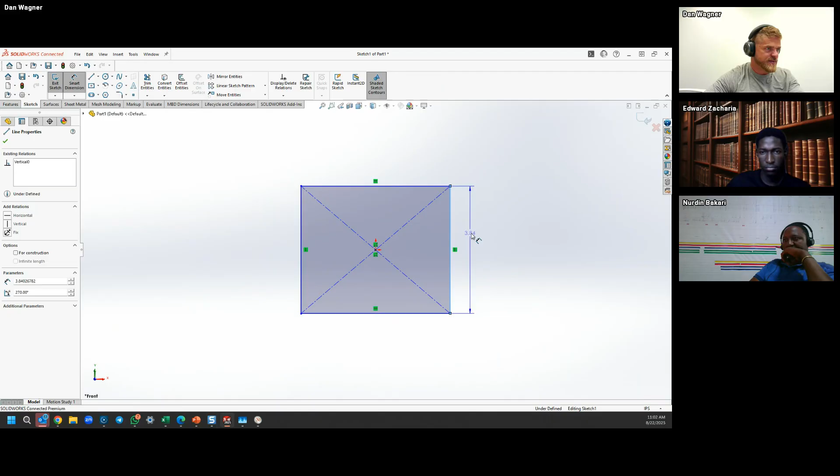Part, we'll do front plane, sketch, same thing here. We'll just do a square. And in this square, I'm going to hit S for shortcut, grab my smart dimension tool here, 12, and then I'm going to hit exit sketch.

And we'll just go right to features, extruded boss. This is the sketch I'm going to extrude. Same thing as before, we'll just extrude this by about 12. Green check. All right, there we go.

Same command as before. If I do sheet metal, convert to sheet metal, you're kind of picking your fixed face. So this is like my fixed top face. And then it asks what bends you want to fold. So I'll fold that one and fold that one. Those are being folded down. And then we'll also fold that one, and we'll also fold that one. And then we'll hit green check.

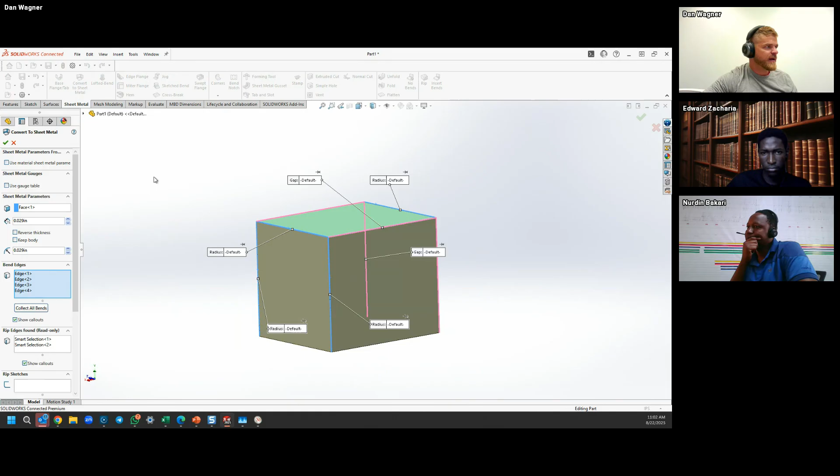All right, so what I was trying to show you before is now that we have this sheet metal body wrapped around itself, we can do flatten and see what that would look like in real time or real space. So that works for sheet metal, but you could also imagine that as like fabric or cardboard as well. So there are other functions, other uses for that.

But if you've ever wanted to model sheet metal, you don't actually have to always model sheet metal, right? You could start with just the box. What is the box shape that I'm trying to get to? And then have convert to sheet metal wrap a sheet metal part around that. So that's pretty cool too.

Yeah, that's such a good question. And that gets back to so much of what we were talking about before, right? Before you do certifications, check SolidWorks RX. Make sure that your graphics card driver is good. Make sure that you have rebooted and you've cleared out your memory that we talked about. Check those BIOS settings, check Windows speed step, like do all of that, because you don't want SolidWorks to crash in the middle of a certification. That's a really good point.

But one thing I would say is when you're doing the certifications, save and save often, right? Whatever certification part you're working on, save it often. File, save as, save it off somewhere. So even if SolidWorks crashes, save frequently. Get used to Control S. Control S is save, right? Do that all the time while you're taking the exam. So even if SolidWorks crashes really quickly, as you saw with me before, even if you have a crash, if the part is saved, you can reboot SolidWorks, get the part back open, and hopefully you don't lose very much time.

Okay, yeah, okay, another quick question. With SolidWorks 2025 now, we have an AI built-in tool. So actually, I'm not familiar with that. If you have any tips on how you can leverage that tool, I think if you can share with us, it will be very helpful.

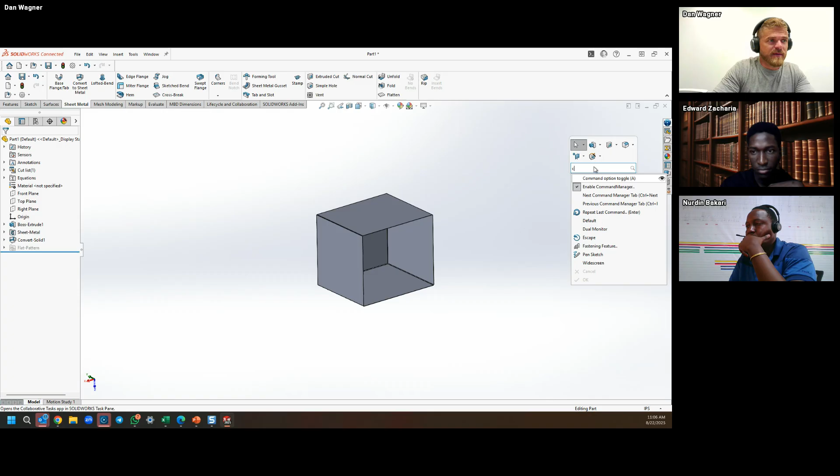Yeah, it's a good question too. I also am not too familiar with it yet. There's a few new AI things coming. But the one I know that we have right now is the command predictor. The command predictor is supposed to kind of predict what command you're going to use next.

Quite honestly, Edward, I haven't spent any time with it either, but on Monday of this week, I just saw a whole new presentation about everything we're doing with AI, meaning everything SolidWorks is doing with AI. So very soon, I hope in the next month, I'll be able to take that presentation and show it to you and to really all the user groups. So why don't we agree that on a future meeting, I'll come back and show everybody here what's new with AI as a whole.

Okay, thank you for that. Yeah.

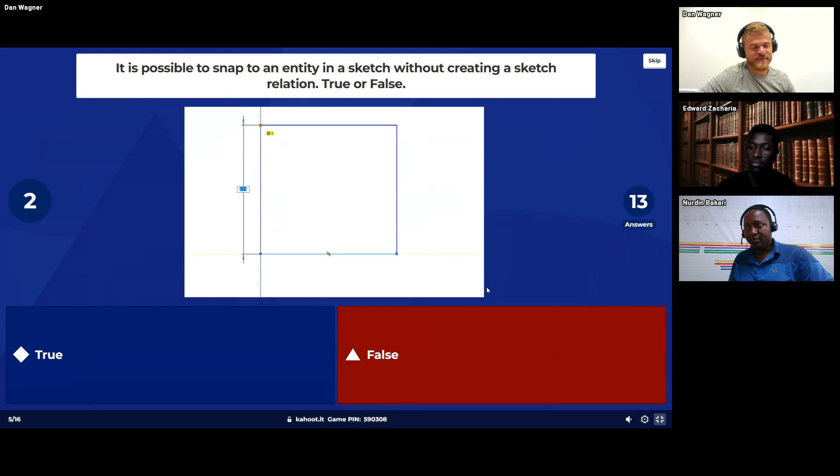All right, so most people said true, and still some 4 people said false, but true is the right answer there - it is possible to do that for sure. Shimmering Armadillo is pulling away here, we got to get someone to move up this leaderboard. I'm not sure who Shimmering Armadillo is, but wherever they are, maybe it's Edward. Edward could be cheating, I'm not sure, I'm just kidding Edward.

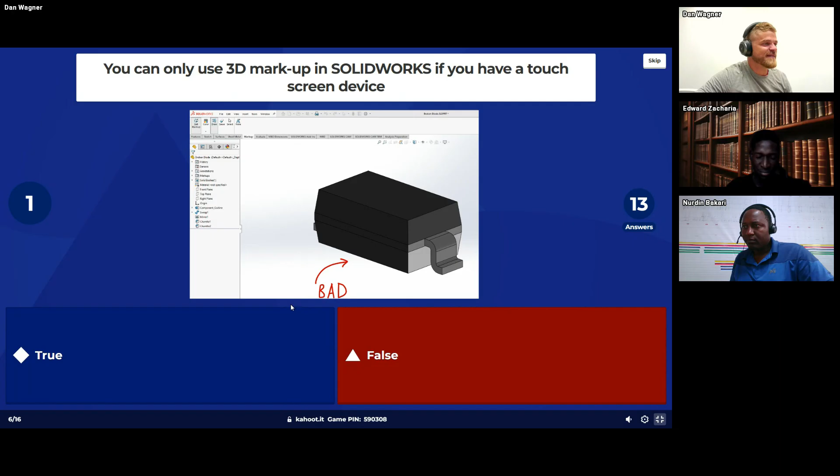You can only use 3D markup in SolidWorks if you have a touch screen. This is a weird one, but you can just guess here. 3D markup is cool because you can do these kind of sketches on screen, but that's false. Anybody can do it - you can use your mouse, you can use a touch screen, or a stylus. 3D markup, if you look for that command, is a cool way to save notes on a part.

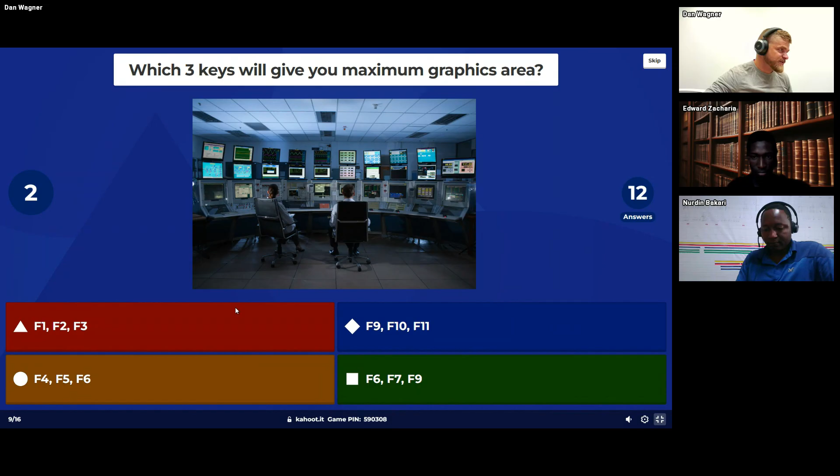Which 3 keys give you the maximum graphics area? We just talked about shortcut keys - pressing this certain combination hides a whole bunch of stuff. What do you think it is? F9, F10, F11 - hide the tree, hide the command manager, and hide the task pane. All of those will get you all that graphic space, so try that on your machine. Shimmering Armadillo is there, but Determined Emu is coming not too far behind.

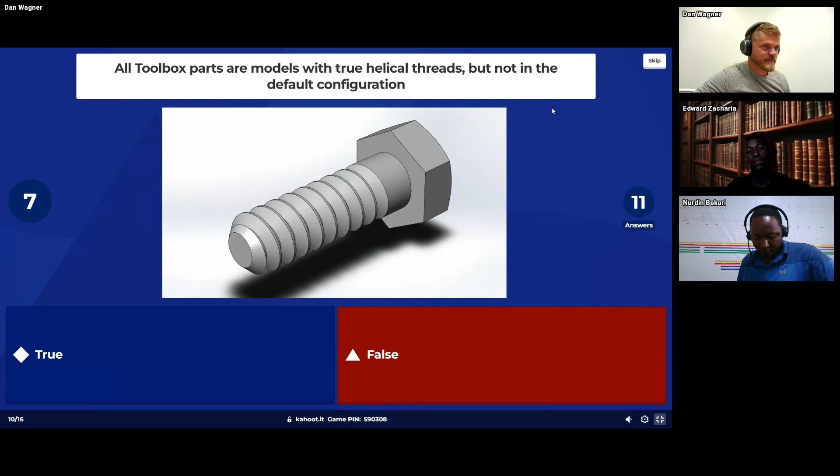That's false, not every part has that. That would be crazy, right? We don't want all those helical threads on every single file. So 6 people got that one right. Shimmering Armadillo, Determined Emu's coming though - this gap looks like it's getting smaller.

How many features, including sketches, are required for this model? We talked about sweeps before, right? How many features, including sketches, would you need to make this? What do you think?

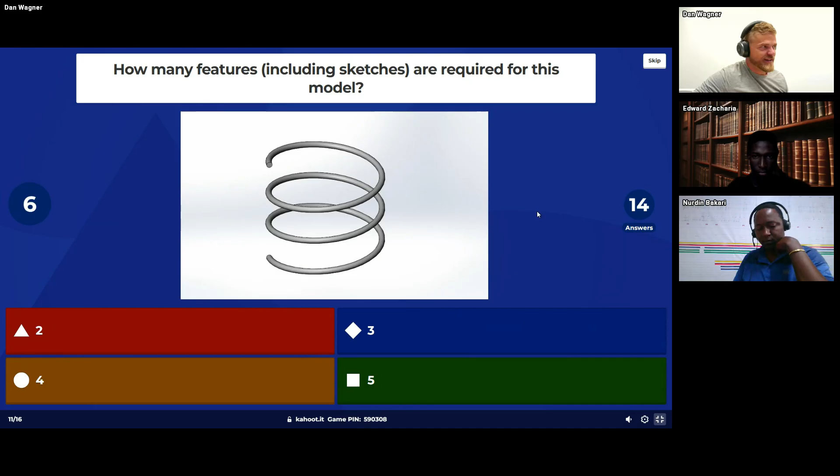All right, 8 people got that - 8 people said 2010, but 2 people said the right one. It was actually 2008, which is the year I graduated college as well, 2008. Shimmering Armadillo still at the top of the leaderboard here.

What version of SolidWorks saw the intro of weldments? When did we first see weldments in SolidWorks?

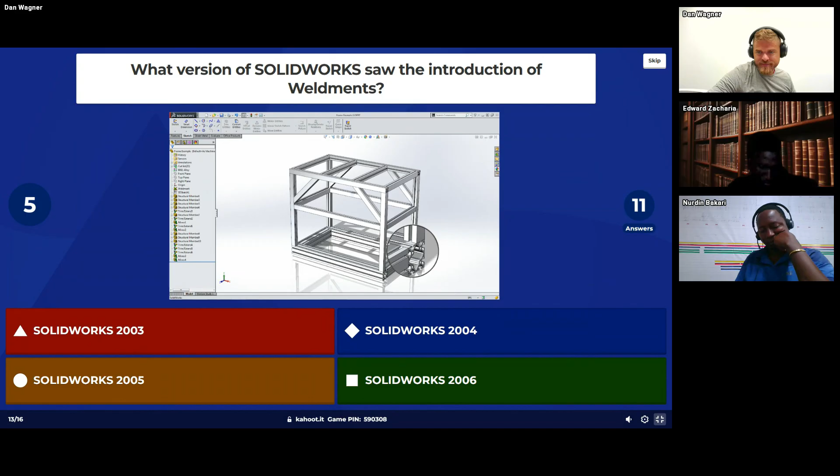All right, okay, so 3 people got that - that was in 2004, which is awesome.

All right, couple more. What is the fastest way to model a real 3D thread? Fastest way - how do you think you can do this really quick with actual 3D threads?

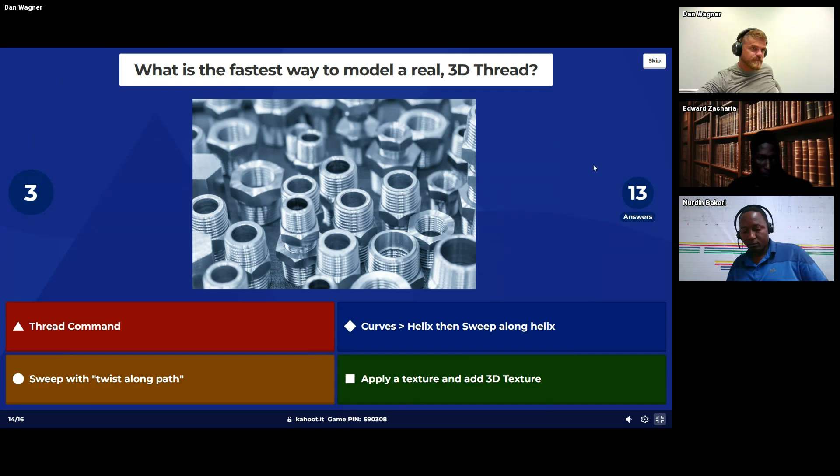11 people got that right - awesome, the thread command, yeah, that's great.

And who was SolidWorks CEO in 2015? That's a weird one, but we added this in here - SolidWorks CEO 2015. This is a little bit of SolidWorks history for you.

Gian Paolo Bassi was CEO - we know now he has moved up even to a higher role in Dassault Systems, but yeah, that was GP in 2015.

All right, I think this is our last question here - was this your favorite SWUGN meeting ever? Yes or no, or one of these other answers.